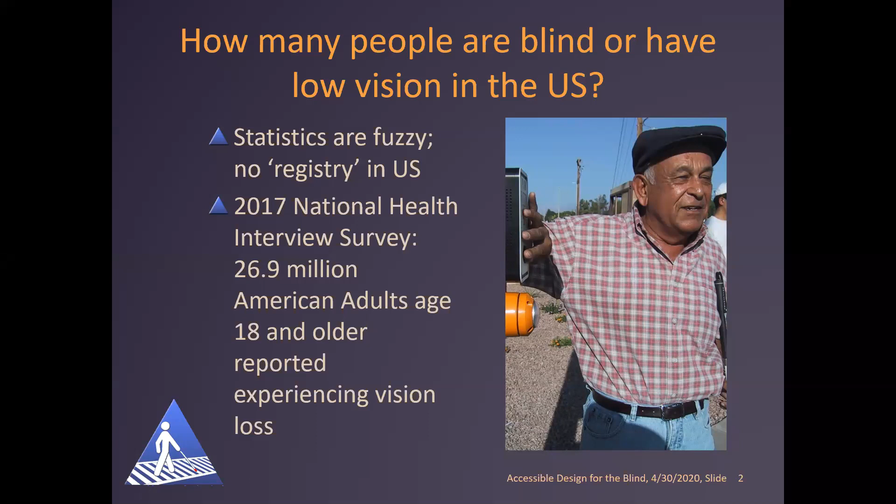Photo on the screen is of an older man with his hand on a push button type device. He has a white cane and looks like he's waiting to cross the street. A person with low vision, importantly, is not totally blind. Those limitations in vision can affect the ability to see signals, both the vehicle signal and pedestrian signal, affect the ability to judge traffic approach speed and distance, and particularly affect understanding drivers' intentions.

There's often advice given to pedestrians to see if the driver's looking at them, or watch for the driver to be waving them on. That doesn't work very well for many people with low vision or who are blind.

Depending on the level of vision loss, a person may not be able to easily find the crosswalk location. They may be depending on the markings and marking type, and may have difficulty seeing things like curbs, islands, or curb ramps.

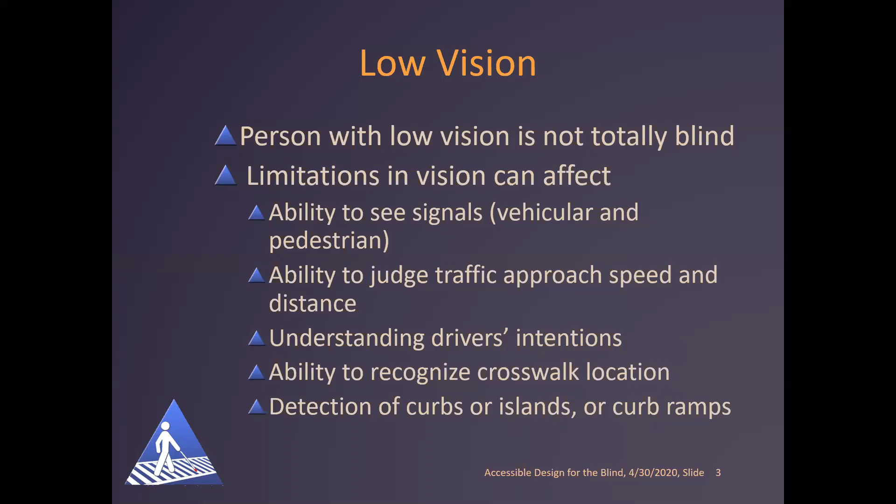We have a growing older population with low vision, and vision really can vary with different lighting conditions. One of the things that is common with older travelers is reduced contrast sensitivity. They need more contrast to see objects.

That may affect their ability to see things in the public right of way, like a pedestrian signal's white walking symbol against the sky. They also may react more slowly and move more slowly.

The photo on the screen shows an older man wearing sunglasses approaching a sign projecting from a post at head height. One other comment I want to reiterate is that many people with low vision do not use a cane or dog guide or any device that makes you recognize there's someone with low vision.

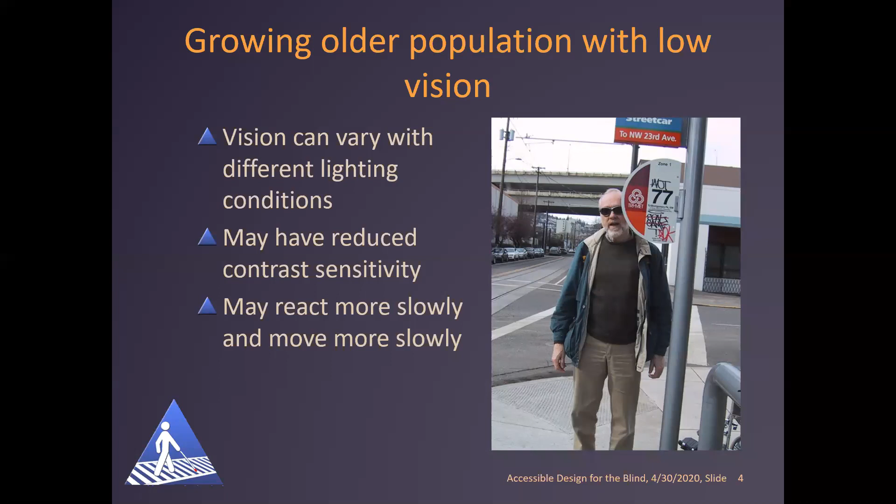For somebody who's blind or low vision, they have several transportation choices. Usually they can't drive themselves, but they can walk or use public transit, bus or rail. Some use paratransit services, taxis, ride services or shuttles, and may get rides from friends or relatives or use paid drivers.

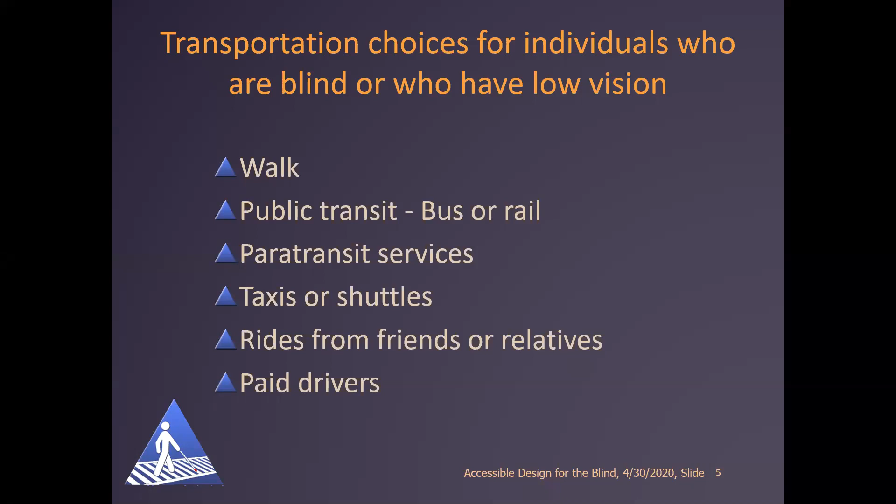People often use aids and techniques for obstacle and curb detection. Photo on the screen is of a man with a white cane extended in front of him while crossing a street. There are choices about what techniques are used by different people. The white cane is used as a probe of the walking surface, detecting changes in elevation or obstacles in the path. It also identifies a person as visually impaired or blind.

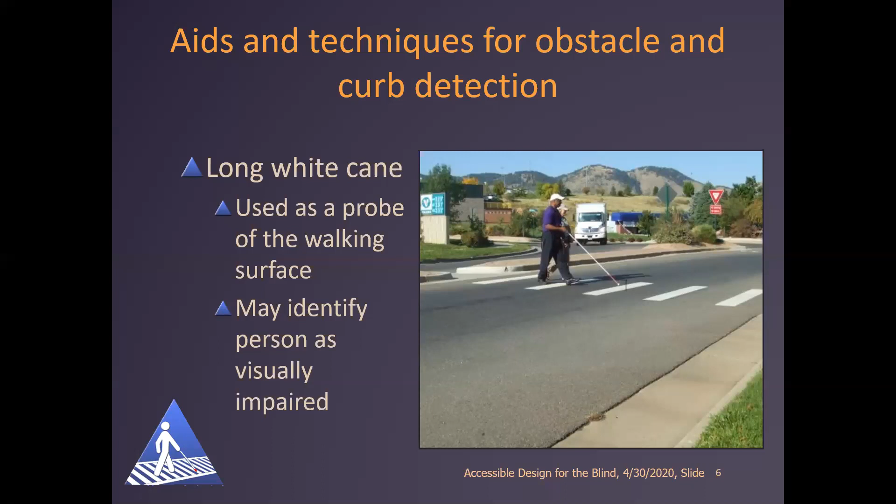Dog guides do guide around obstacles and stop at curbs and drop-offs, but the dog doesn't make the decision about when to cross the street or what to do when there's an obstacle blocking the whole sidewalk. The handler makes the decision and provides a command to the dog, directing it along a route with commands such as right, left, forward - not commands such as take me to the grocery store.

Other aids some individuals with low vision may use include additional aids such as a telescope, just for specific tasks like reading a sign.

In crossing the street, cues used at signalized intersections are the traffic stopping, vehicles starting and stopping, moving across the intersection, or accessible pedestrian signals. Different cues are used at unsignalized crossings. People need to listen for vehicles approaching or no vehicles, or hear a vehicle yielding, and often listen to traffic moving parallel to the crosswalk that would keep a vehicle from crossing it. Those cues aren't available at many unsignalized locations and may make those crossings difficult.

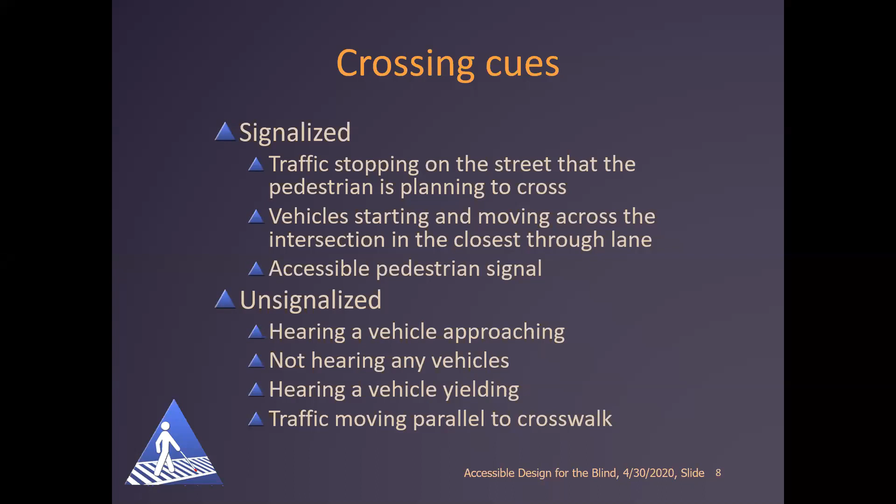Orientation and alignment cues are what we'll really be talking about today in this webinar. We talked more about signals and issues with signals in the webinar on Tuesday, so please consider going back to that if you're interested in or concerned about those issues.

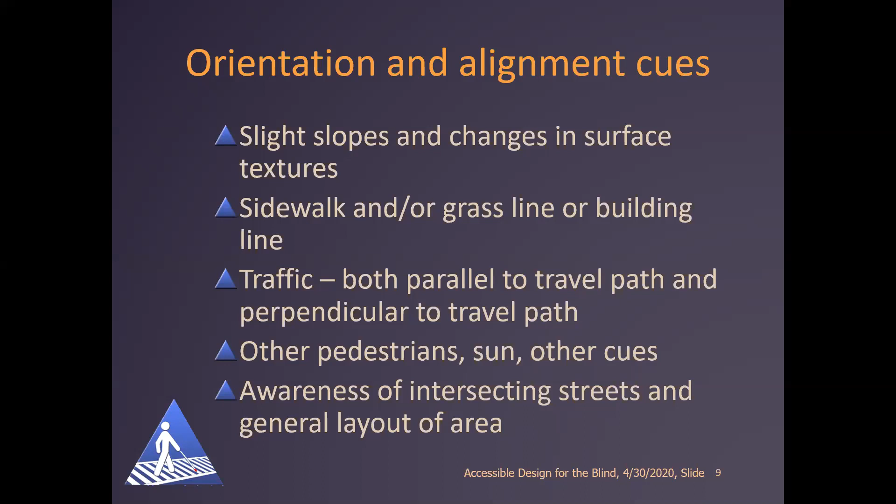In orientation and alignment, people use different things and different techniques work for different people. An individual may use slight slopes and changes in surface texture, the sidewalk edge or grass line, building line. They use the sound of traffic, both parallel and perpendicular to their travel path. When available, they pay attention to other information such as other pedestrians moving, the sun, and other sound cues common in the environment, or information gathered tactually and auditorially. For orientation, it's generally helpful to have awareness of the intersecting streets and general layout of an area.

There was a project that looked particularly at orientation and alignment cues and wayfinding for individuals who are blind or visually impaired, particularly at roundabouts and channelized turn lanes. It was NCHRP Project 3-78B, Guidelines for the Application of Crossing Solutions at Roundabouts and Channelized Turn Lanes for Pedestrians with Vision Disabilities. Part of that project was research on wayfinding at roundabouts and channelized turn lanes, noting problems participants had, and also finding features that improved their ability to find the proper location to begin crossing and to align to cross more accurately.

We were not looking at locations where tactile warning surface indicators were installed, which is more what we'll talk about in later parts of this presentation. But NCHRP Report 834, published in 2017, did include a wayfinding assessment that can possibly be applied to other types of intersections, so I encourage you to look at that report for additional information on wayfinding and orientation and alignment cues.

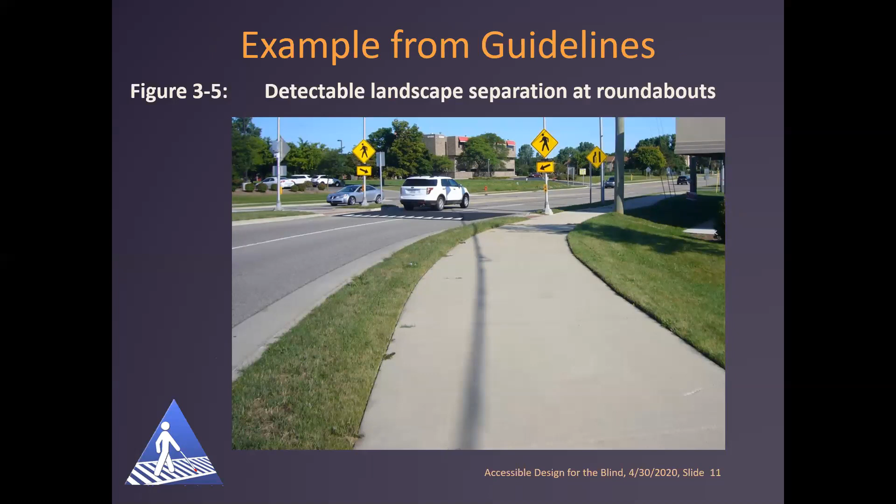Just a photo example from the guidelines in that publication. The photo shows a roundabout with a fairly wide sidewalk, but a landscape separation between the sidewalk and the street, a grass strip that follows the curvature of the street and ends right at the crosswalk. That's a detectable landscape separation at roundabouts that helps individuals who are blind or visually impaired find the crosswalk location accurately.

Important information to remember is that people who are blind do travel independently to new places. They are not oriented to every place they may go. They're traveling to unfamiliar destinations for shopping, errands, visiting friends, children's activities, all the kinds of things that fully sighted people might be doing. They're more likely to be using transit and walking rather than driving themselves. They may get directions from people or use a GPS device.

They walk along the streets and get to intersections and basically have to figure it out when they arrive. If they're unaware of changes to intersections or just not familiar with an intersection, they may at times make dangerous decisions, especially when the layout's unconventional or a familiar intersection has been changed. We'll talk more about cues that people can use in traveling, and I'll turn it over to Donna, who will talk more about that.

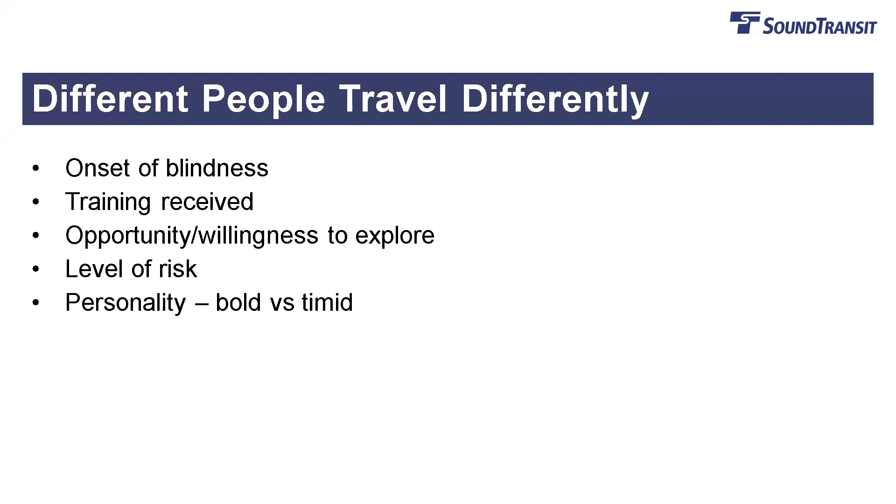When we're planning or designing pedestrian facilities for the public, it's important that we keep in mind that not everyone travels independently in the same way or with the same level of skill. And we want to make sure that our facilities work for as many people as possible.

There was a lot of information on the first webinar that happened on Tuesday about how people who are blind travel. I hope that if you did not participate in that webinar, that you listened to that recording. For the sake of time, I'm going to kind of jump through this particular slide a little quickly and only touch on a few things. But I use sound and touch—those are my two major senses that I use when I'm out traveling around.

We've already heard some of the things about audio cues and how the sound of traffic helps us stay oriented and know when to cross the street.

The one that hasn't been mentioned that I want to mention is echolocation. This is when you can hear obstacles because they interrupt the sound of open spaces. So when there's wide open space, and then all of a sudden there's a pole or a person or a bus shelter or a wall that you're coming up on, that interrupts that open space sound, and you're able to actually hear it. This is not something that most people with vision pay much attention to, because you don't have to. I did threaten the last person who compared me to a bat, but it is that same type of system that bats or dolphins use—using sound that bounces off of buildings and other obstacles to stay oriented. And I use this quite a lot.

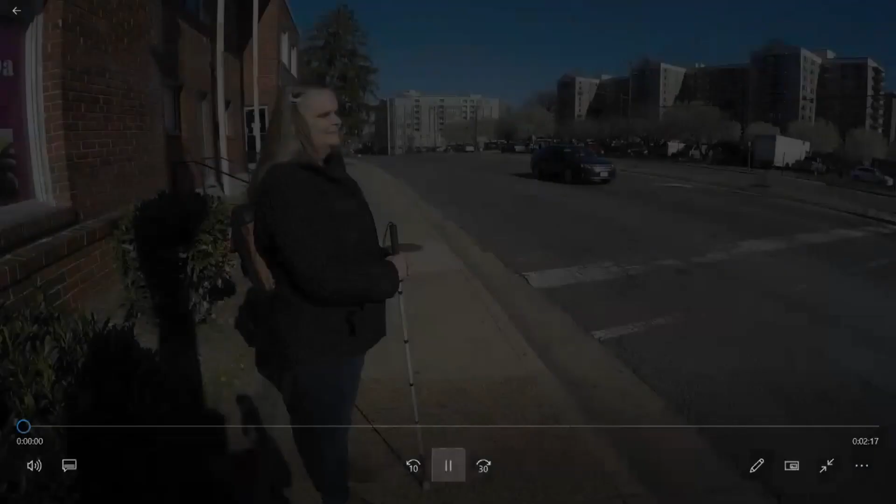This is the top of a T intersection that I have to cross every day. The sound cue I'm listening for is traffic moving in the parallel direction, the same way I'm trying to walk. Because it's a T intersection, I'm not going to get that sound cue. I can hear the traffic in front of me, and the only thing I'll be able to hear when this traffic stops is the turning traffic from the other side of the road. So that's my cue as to when I can walk.

We're going to listen to this for just a minute. We have good, strong traffic on Columbia Pike. No problem telling that I can't walk right now. Let's listen. Still moving through, you can still tell that. Right now it's getting a little quieter. That car is still obviously going, so I can't cross yet. Still moving. Alright, so I know it's getting close. Now I do hear a car turning. I can hear, I still have through traffic that way. Alright, I think I can cross now.

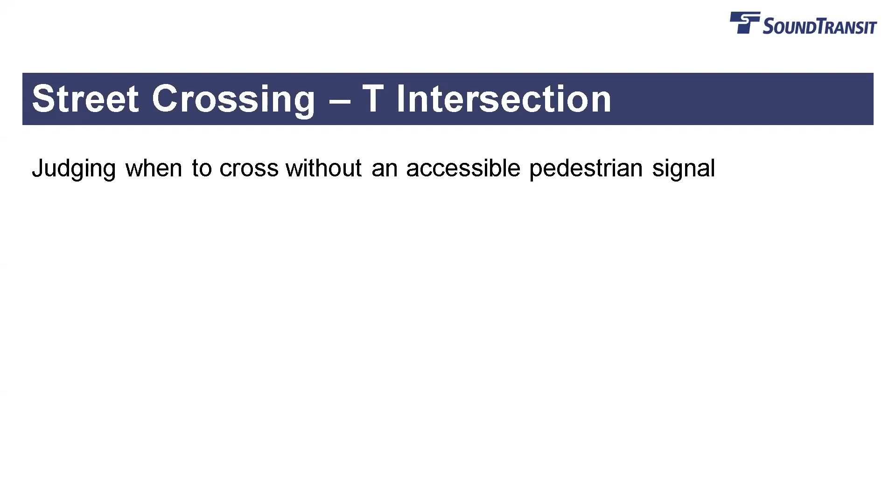Another thing to consider is that the sound of the wind, which you could hear blowing against the microphone, also affects what I can hear and how I use it. So that makes it a little bit harder for me to cross streets when there's that kind of sound going on as well. This video is going to be posted up with the webinar materials as well as 2 other videos we don't have time to show, so feel free to download those and check them out later.

The waiting pad, we call those corduroy pavers. They kind of feel like corduroy, with ridges under your feet and under your cane. They're pretty distinctive - you can tell them easily apart from the tactile warning strip, the truncated domes, and also from the tactile wayfinding paver itself. So you know that when you get to the waiting pad, that's where the train door is going to open. We have markers on our platform so that when the operator drives the train in, he stops at that marker, and when the doors open, there is always an open door in front of the waiting pad. We have 2 of these on each of our platforms for our light rail system.

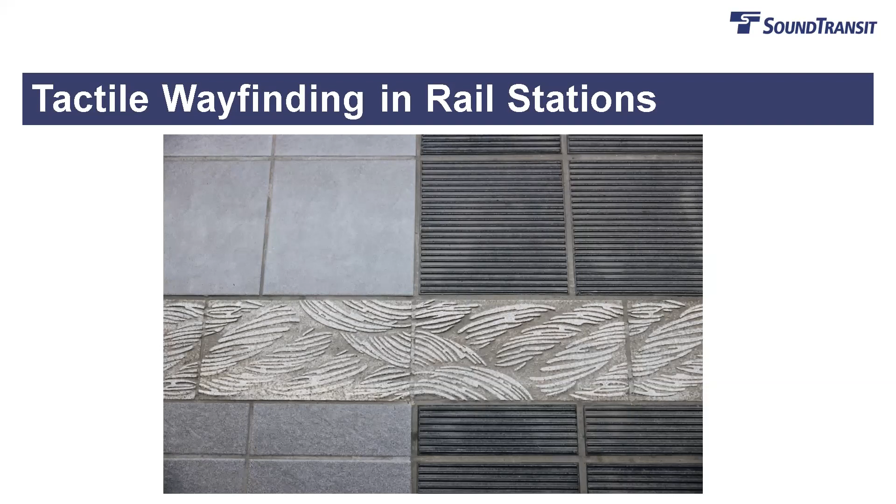And of course, the best way to figure that out is to have people who use canes help you determine what's the best surface to use.

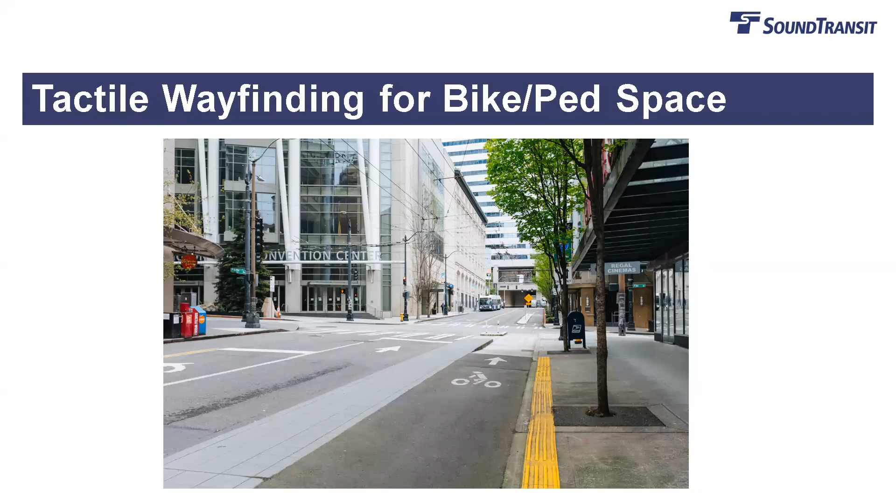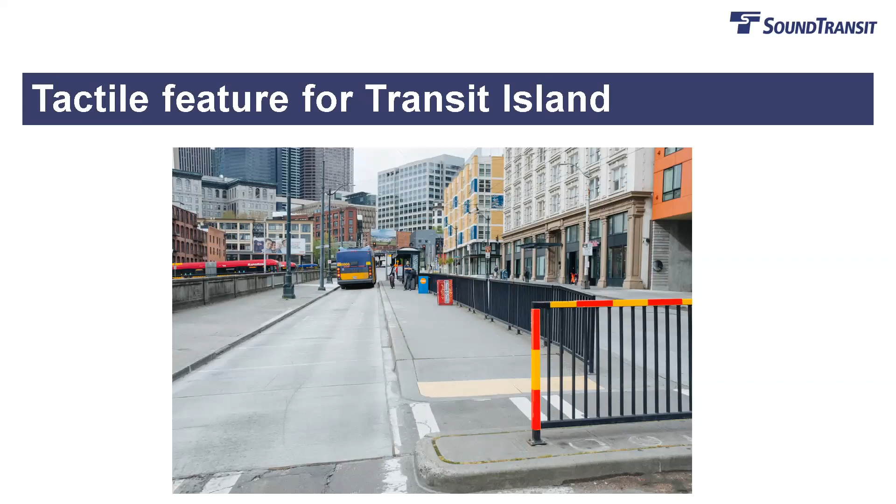This is a transit island near my office in downtown Seattle. You can see it uses handrails and fencing to direct pedestrians to walk up that island to the bus shelters and the bus stop in order to catch their bus, and it gives them some protection from drivers. It's also very visible to drivers that this is where pedestrians will be.

As I've mentioned before, there's always some level of stress. I've been doing this for 58 years, and no matter how familiar I am with a particular location, there are always things that change within that environment, so there's always some level of stress. These are some things that I think we can start to incorporate in design that will help alleviate some of that stress and make it easier.

So first, consider the travel needs of everyone. Don't just focus in on that norm. You're going to be missing out on people who really need to use your facilities.

So I hope you'll think about some of the things you've learned about how I travel. I do not fix on a visual point hundreds of feet in front of me and then start walking toward it, that's just not within my ability to do. I don't do it that way. I do have a route in mind, and I know generally speaking what the layout is, unless of course I'm going to an unfamiliar place.

What I'm doing is working through a series of sequential cues that can be found through sound or the reach of my cane. So in a very defined space around me, the extent of what I can hear and touch with my cane as I'm walking forward, this is what I'm using in order to navigate.

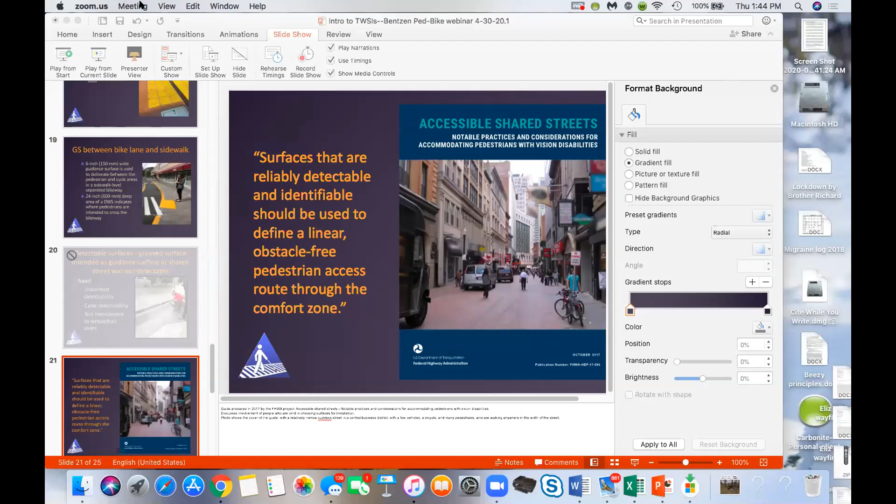Okay, there are 3 more presentations here that are all related to what are known as tactile walking surface indicators. First, I'm going to give a little bit of background. Then Rob Wall Emerson is going to talk about some research to solve a particular kind of problem using tactile walking surface indicators, and then I'm going to talk about another research to find another solution.

Tactile walking surface indicators were developed in Japan in the 60s as a guidance and warning system. They used raised domes or truncated domes to indicate cautions, a transition, or point of interest, and raised bars oriented in the direction of travel to indicate the path of travel. They're used with some variations to some extent in most developed urban areas of the world, and are broadly standardized in an international standard, ISO 23599, which allows a lot of latitude.

Oh, why is my screen not advancing here?

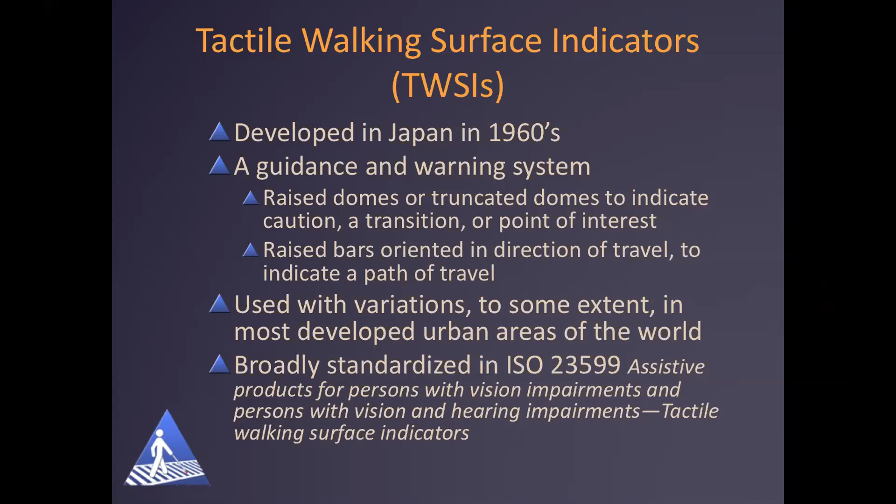The standards that we have in the US were a result of a lot of research. Donna mentioned that it's very hard to detect a lot of surfaces that look like they would be detectable, like the wavy surface that's used on transit platforms in Seattle. No surface that was comprised of grooves in concrete was ever found to be detectable.

It's important that it's detectable both underfoot and with a cane. Some things that are detectable with a cane won't be detected underfoot. Underfoot is the most important thing because many people who are visually impaired don't travel with a long cane. But surfaces that were raised domes or truncated domes or raised bars that were 0.2 of an inch high were highly detectable, and it was found that about a 24-inch width in the direction of travel was necessary for most people to detect them and come to a stop without going beyond them.

This is important in thinking about our detectable warning standard. The federal standard is a detectable warning of a minimum of 24 inches in the direction of travel, because they're usually used where you have either a drop off or traffic in front of you. So it's important that you not go beyond them without stopping. And it was also found when they were implemented that they increased safety at platform edges and curb ramps for all riders.

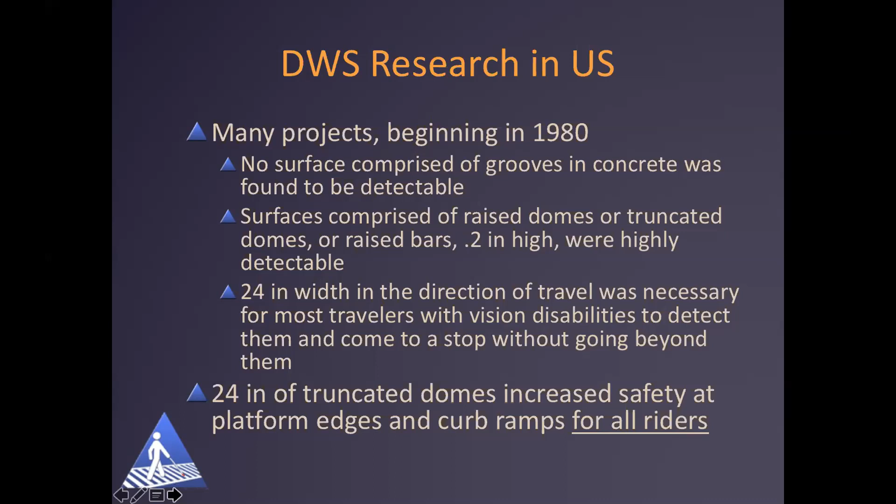I think one of the most useful standards, there's several, but it is the 2006 DOT ADA standards, and section 705 specifies the dome size and spacing and visual contrast. The drawing on this slide shows that the domes are 0.2 of an inch high. The base diameter can vary between 0.9 to 1.4 inches, and the top diameter is in relation to the base diameter, 50 to 65%, and the center spacing can vary from 1.6 to 2.4 inches. So there can be quite a wide variation. In point of fact, most manufacturers are manufacturing to the wider spacing of the truncated domes and the smaller domes.

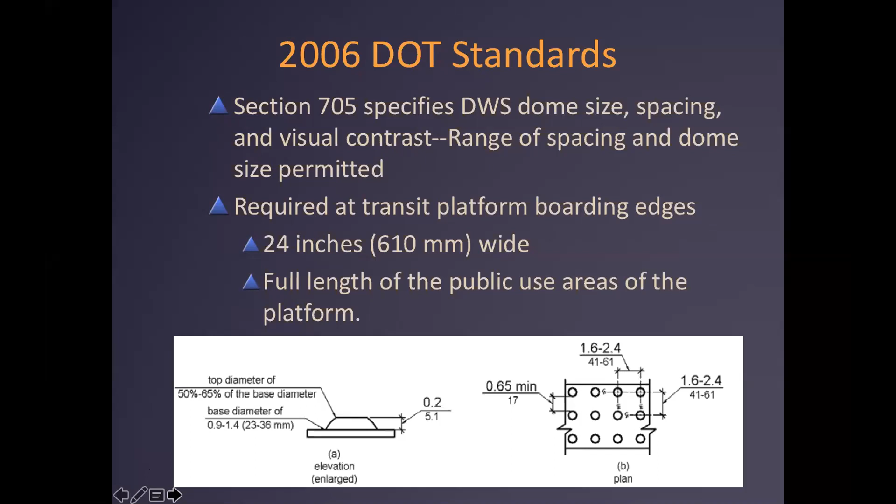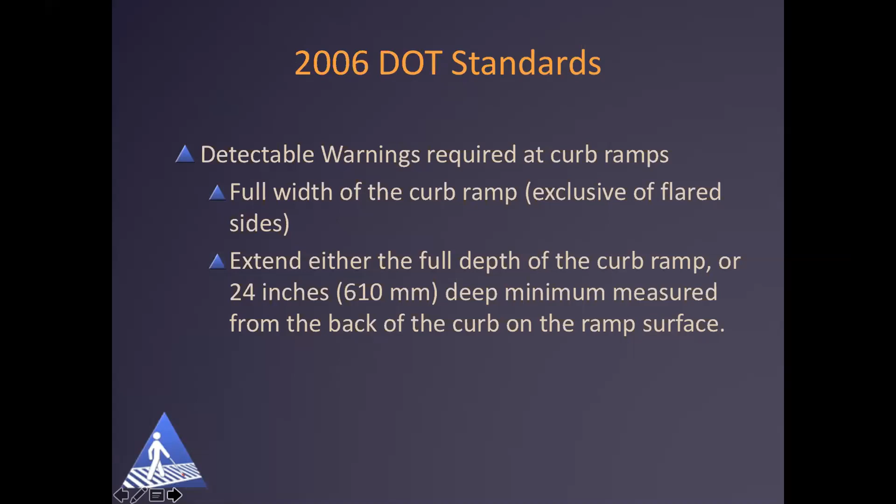So the 2006 DOT standards require them both at transit platform edges and at curb ramps. When they're in curb ramps, they're the full width of the ramp, not including these flared sides. And they can extend either the full depth of the curb ramp—I don't think anybody's doing that anymore—or 24 inches deep minimum measured from the back of the curb on the ramp surface. As far as I know, the only other place that there is a different standard for that is that California requires 36 inches on curb ramps.

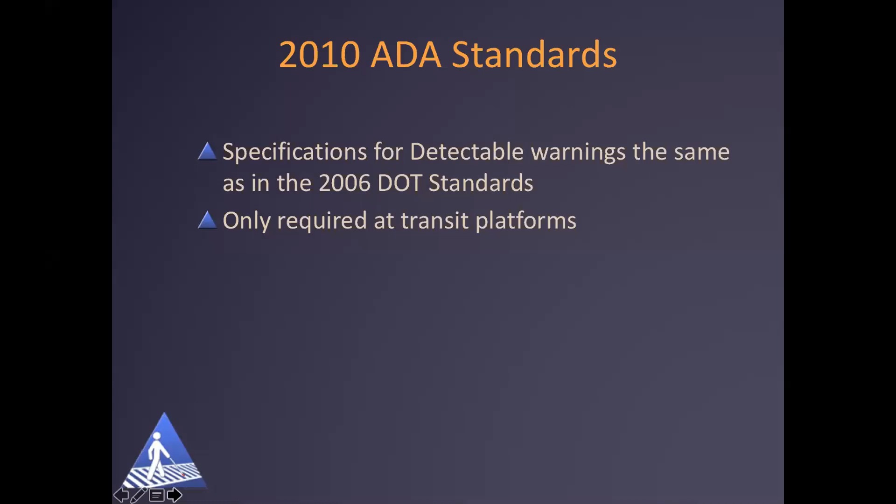The 2010 ADA standards, the most recent DOJ ADA standards, have the same specifications as in the 2006 DOT standards, but they only require them at transit platforms. It's the DOT standard that requires them also at curb ramps.

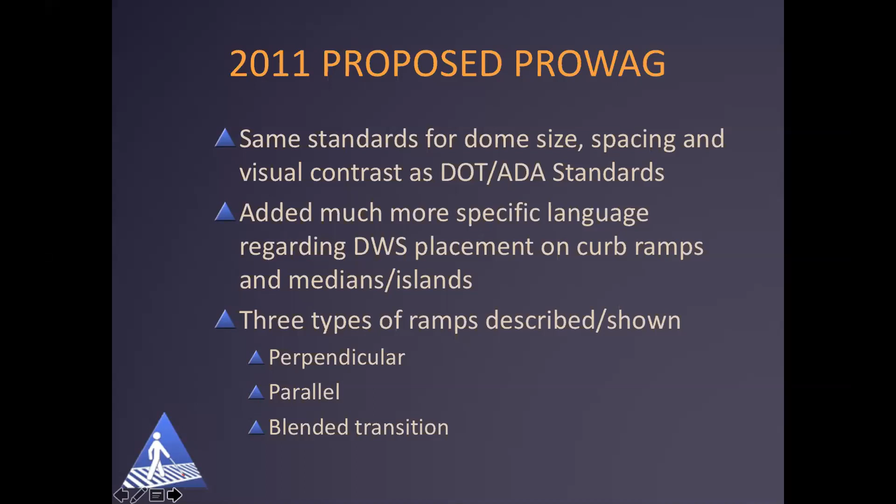Then we have the 2011 proposed PROWAG, not yet a final standard, but considered the best design guidance for detectable warnings. It has the same standards for dome size, spacing, and visual contrast as the DOT and ADA standards, but it added much more specific language about the placement of detectable warnings on curb ramps and medians and islands. It talks about 3 different kinds of ramps: perpendicular, parallel, and blended transition. I'll let you go to that standard to see what they are, but there's quite specific guidance about different situations.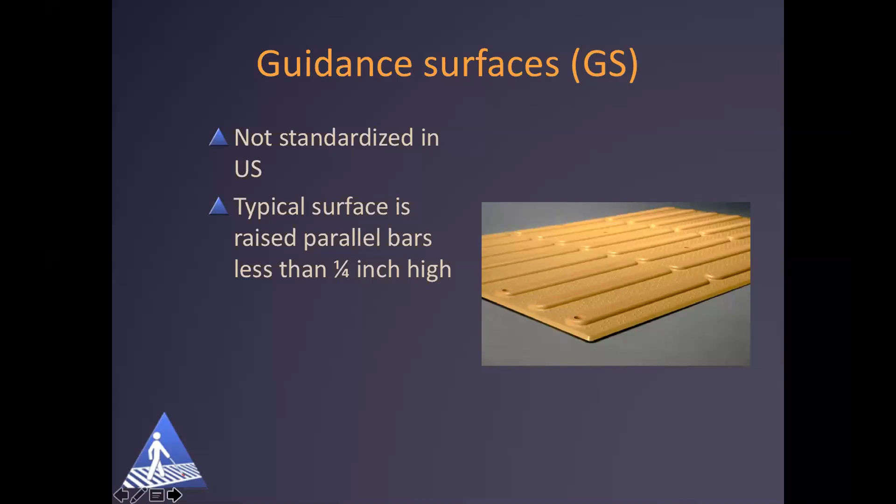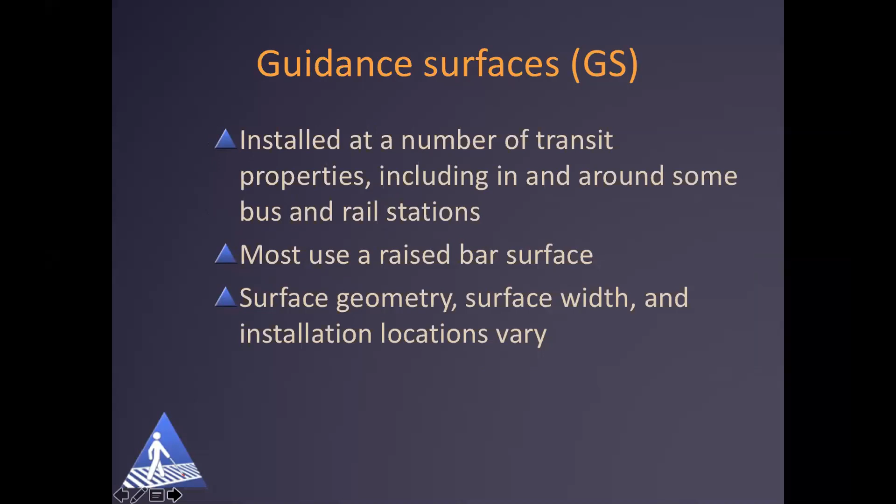Guidance surfaces have been installed at a number of transit platform properties, including and around some bus and rail stations. Most of them used a raised bar surface, but there are a lot of variations. Here are a couple of examples.

In the drawing on the left, a black 12-inch wide raised bar guidance surface leads through a fare gate in a transit station. And on the right, a yellow 6-inch wide guidance surface leads on 2 sides of a wide sidewalk from a transit station out to a bus stop.

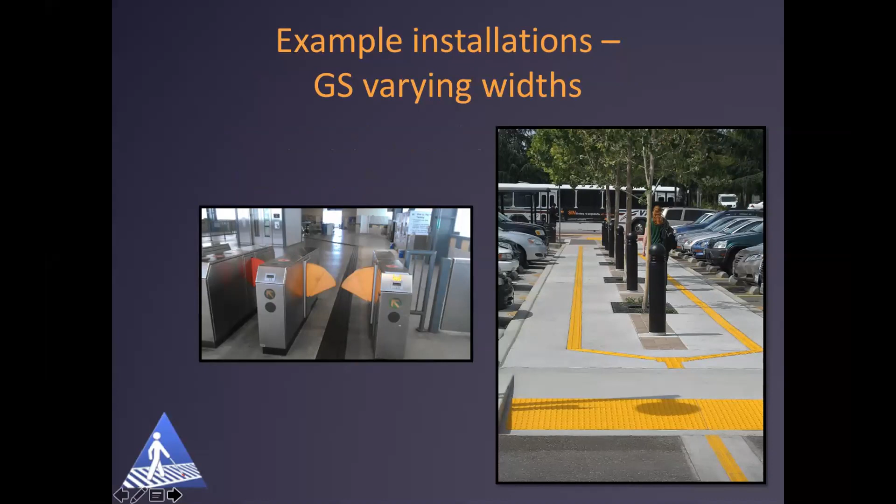Two more examples here. On the left, a 24-inch wide black guidance surface leads to the stairs in a transit station. And on the right, a 6-inch wide yellow guidance surface leads along a sidewalk to a bus stop.

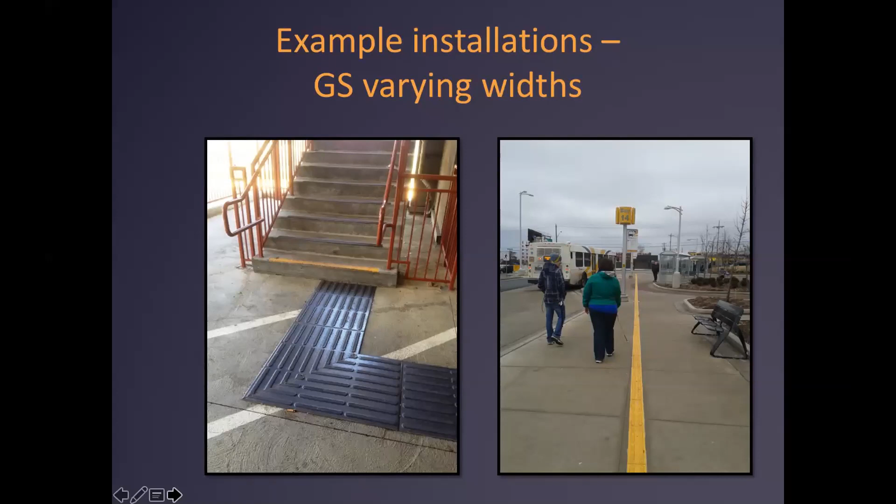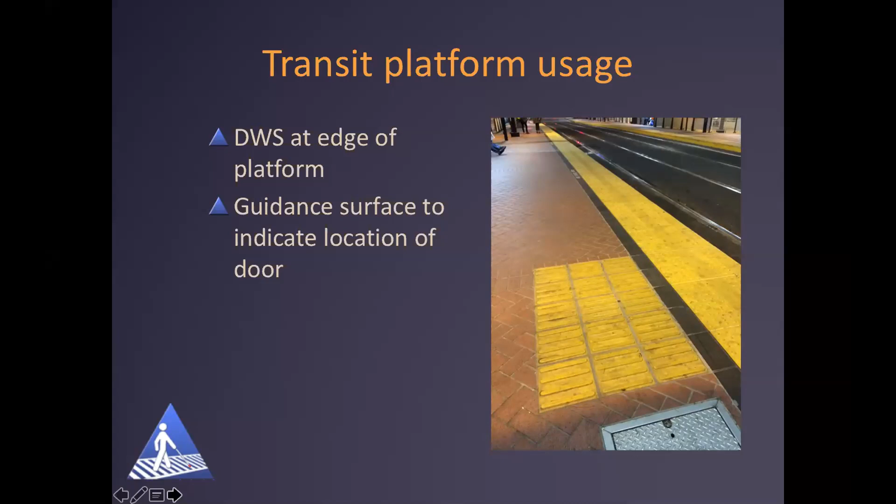Detectable warnings are now installed or planning to be installed on all transit platforms in the US at the edge of the platform. This is different than in lots of other places around the world where they're set back from the edge. In this photo, you see the yellow detectable warning surface right at the edge of the platform at the drop, and then a 6-inch wide black surface along the edge of the detectable warning, farther away from the drop, to increase the contrast between the brick red of the platform and the yellow of the detectable warning. And then there's a 5-foot wide, 3-foot deep rectangle of raised bars that indicate where the train door will open.

This slide shows a 6-inch wide guidance surface that had been used in Seattle to delineate between the pedestrian and cycle sides in a sidewalk level separated bikeway. They found that 6 inches wide wasn't enough, and they're in the process of changing that to 12 inches wide. In this photo, a 24-inch deep area of a detectable warning surface indicates where pedestrians are intended to cross the bikeway.

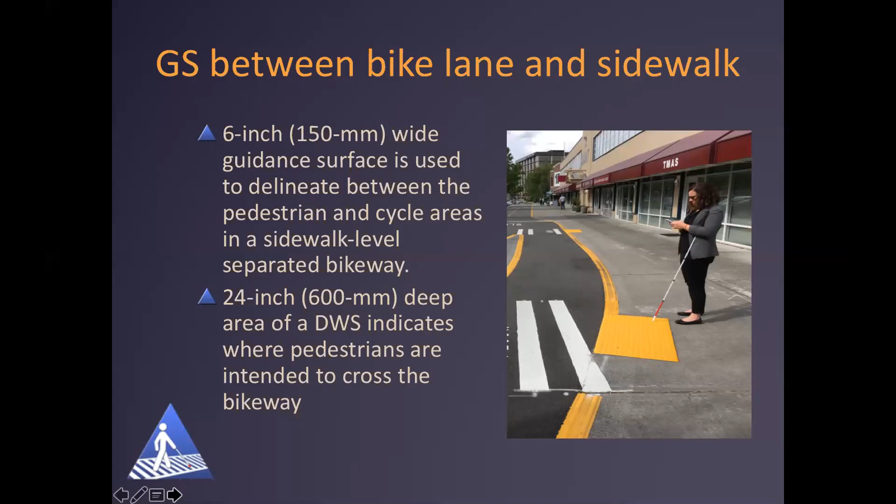There was a project concluding in 2017, an FHWA project that Elizabeth Hilton was leading, on accessible shared streets. The title of the report is Accessible Shared Streets, Notable Practices and Considerations for Accommodating Pedestrians with Vision Disabilities. A quote from that report: surfaces that are reliably detectable and identifiable should be used to define a linear, obstacle-free pedestrian access route through the comfort zone.

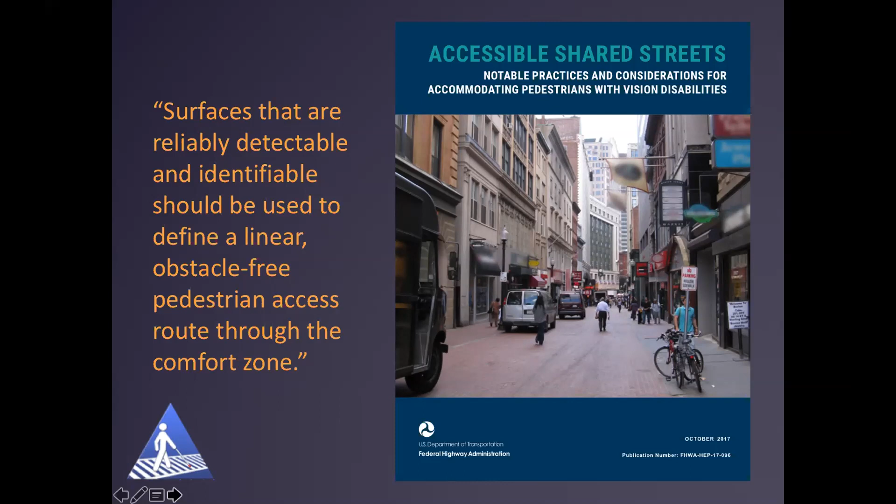There's been some recently completed research that extends this. At the conclusion, I will be talking about research to identify a delineator for separated bike lanes at sidewalk level that's highly detectable to pedestrians with vision disabilities and crossable by people with mobility disabilities. This was an activity of the Better Market Street project in San Francisco, and came out with a recommendation that a raised trapezoidal strip, 0.75 inches high, 6.25 inches wide at the top, with sloping sides at a 22-degree angle, should be used as the delineator for separated bike lanes at sidewalk level.

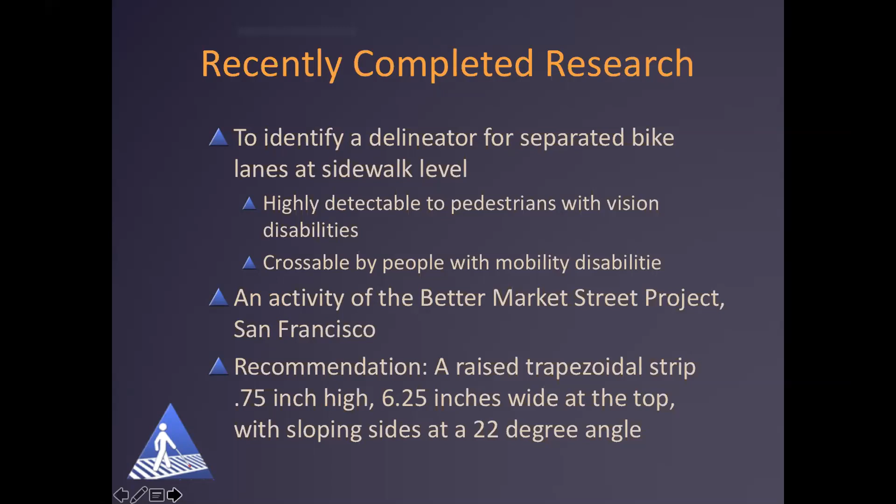So there's ongoing research on TWSIs, Rob is going to talk about this in a minute. The project was called Effective Guidance Surfaces for Travelers with Vision and Mobility Impairments, and this was research on a novel use of a guidance surface to aid in locating crosswalks and aligning to cross in challenging locations.

Additional ongoing research that Janet Barlow and I are both involved in is tactile wayfinding in transportation settings for travelers who are blind or visually impaired. This includes both public rights of way and transit. It's under the Transit Cooperative Research Program B46, led by the Highway Safety Research Center at University of North Carolina. It consists of laboratory research that will identify the geometry of a guidance surface that's highly detectable and discriminable from the detectable warning surface. You've got to be able to find it, and you've got to be able to know that it's not the truncated domes. And it will determine whether a special indicator surface is needed at choice points, and identify a recommended surface if needed.

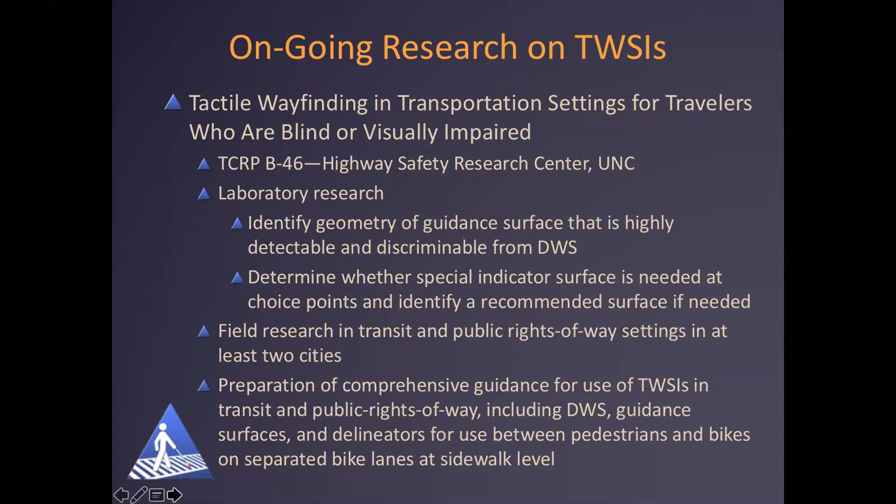This is common internationally. We're not sure whether it's really needed, so we'll do some research on that. There will also be some field research in transit and public rights of way in at least 2 cities. And finally, preparation of a comprehensive guidance manual for use of tactile walking surface indicators in transit and public rights of way, including detectable warnings, guidance surfaces, and delineators for use between pedestrians and bikes on separated bike lanes at sidewalk level.

And now I'm going to turn it over to Rob, who will talk about the research to help blind people locate hard to find crosswalks and align to cross.

Thank you. And I will try and share.

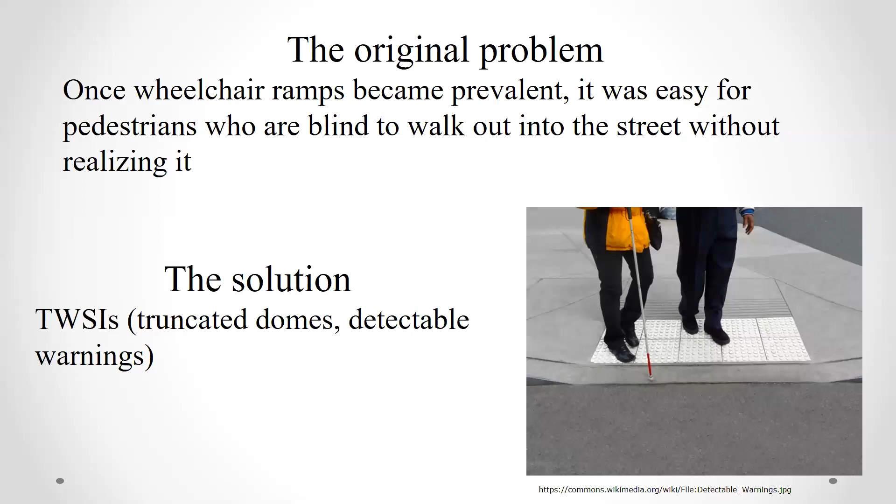tactile walking surfaces are used primarily as what we call detectable warnings. These are the truncated domes at the bottom of wheelchair ramps, and this is prevalent because when wheelchair ramps first became more ubiquitous within the built environment, people who are blind could easily walk into the street without realizing it. So the answer is that detectable warnings, the truncated domes, are placed at the bottom of ramps simply to indicate the place where the walking surface transitions to the road surface, but there is no actual step down or step up. There's no level change.

That, to some extent, solved the problem of people who are blind walking into the street down the ramp, but it has led to some other secondary issues.

The bottom of a wheelchair ramp isn't always the place where a person who's blind should stand to cross the street. It often is, but it isn't always. And so it leads to the misunderstanding that that is where you're supposed to stand. There's 5-10% of the time that is incorrect.

The other, I think, common misconception is that people who are visually impaired or blind get alignment for their crossing from the detectable warnings, and that is incorrect. They are detectable underfoot and by the cane, but they do not provide any kind of alignment information.

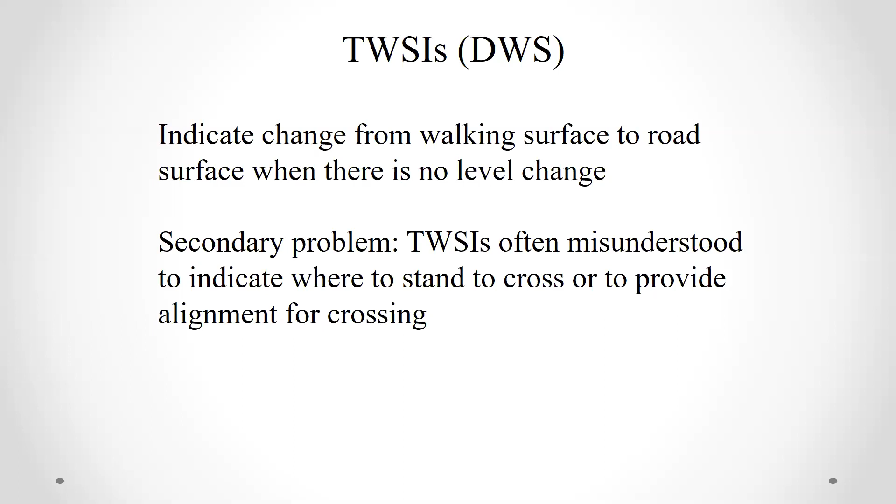Now, Donna did talk about using traffic. Traffic flow is a very robust cue for people lining up to cross a street. However, if you're faced with certain kinds of crossing situations, such as a skewed crossing, that robust alignment to traffic can lead you to align incorrectly for the crossing. And on a corner like these, you wouldn't know that until you started crossing and did not end up going where you thought you were going to go.

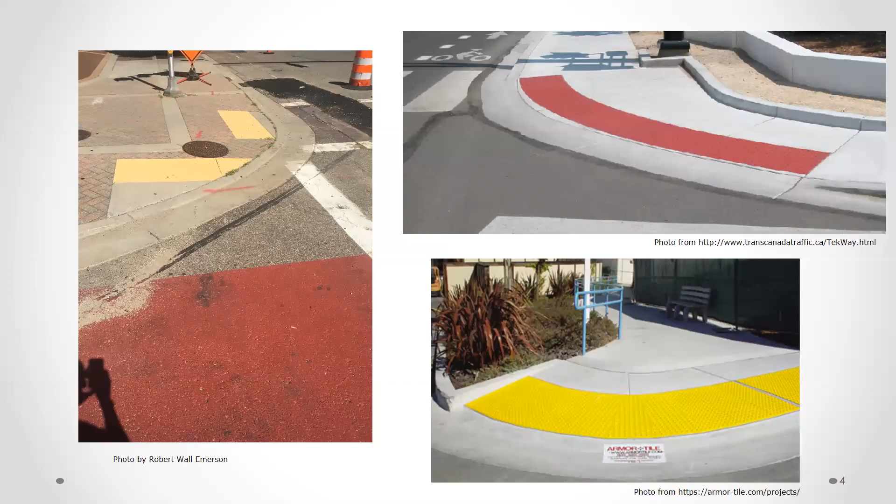BL mentioned that there are these guidance surfaces that are used in many places, many other countries, and then more recently in the US for different functions.

These parallel bar tiles, guidance surfaces, can be used for alignment. If a person who's blind or visually impaired stands on these bars so that they run perpendicularly under the balls of the feet, often you stand on the very first line of bars or the very last line of bars in the set of parallel bars, you can get a sense of alignment from that. And as long as these are installed to actually be lined up with the crossing, that does provide a tactual alignment cue for the crossing.

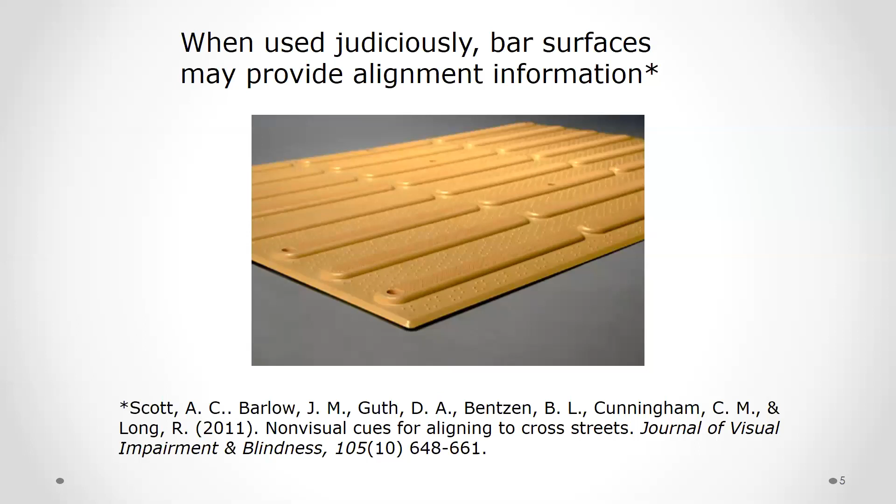So for this project, we looked at those bar tiles, which I'll refer to as guidance surfaces, to indicate where a pedestrian would stand to cross and to provide alignment information.

We used these at crossing places that might be confusing: roundabout crosswalks, mid-block crossings, skewed crosswalks, places where either the traffic or traffic patterns would lead to incorrect alignment, or where it was difficult to decide exactly where a person was supposed to stand to cross.

I want to highlight that we didn't think this would replace detectable warnings. These would be used in conjunction with detectable warnings. Detectable warnings serve one function, which is to indicate the bottom of the wheelchair ramp, the boundary between the walking surface and the road surface. These would be used only at certain difficult crossings to indicate more precisely where a person should stand and to give them some alignment information.

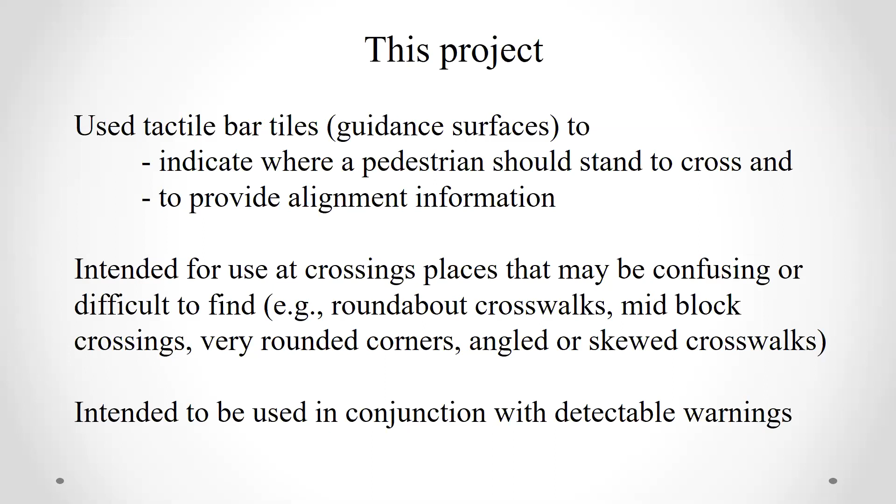We did two phases. I'm going to talk about phase 2 first. That was with people who were visually impaired and blind. The first phase was people with mobility impairments, and I'll talk about that after this slide.

We looked at a lot of different kinds of problematic crossings: skewed crossings, crossing the top of a T, very large radius corners, apex ramps. That's a good example of a place where the patch of detectable warnings may not necessarily indicate where you should stand for either of the crossings.

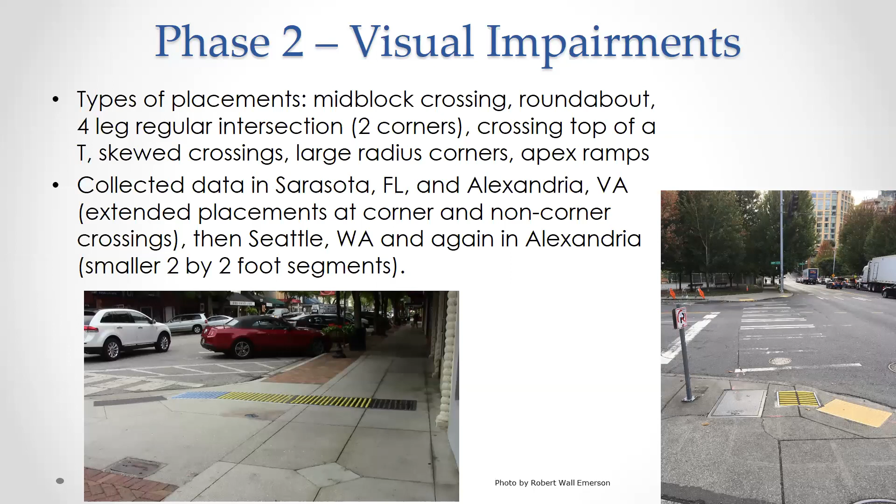We tested the placement of these guidance surfaces with people with mobility impairments who used manual and power wheelchairs, mobility canes, crutches, walkers, and a variety of mobility aids, to see how traversing these surfaces in different ways might create problems. It turns out that for almost all participants in that study, crossing the guidance surfaces parallel with the line of the raised bars was the easiest way to traverse them, the least inconvenient way.

This works out well, because in that installation at the mid-block crossing, with the guidance surfaces extending across the entire sidewalk, a person in a wheelchair just going along the sidewalk would roll right through the grooves between the raised bars, ideally, without discomfort. And if they wanted to turn and go down the ramp to use the crossing, these would not be on the ramp either, so they would not be inconvenienced in that regard either.

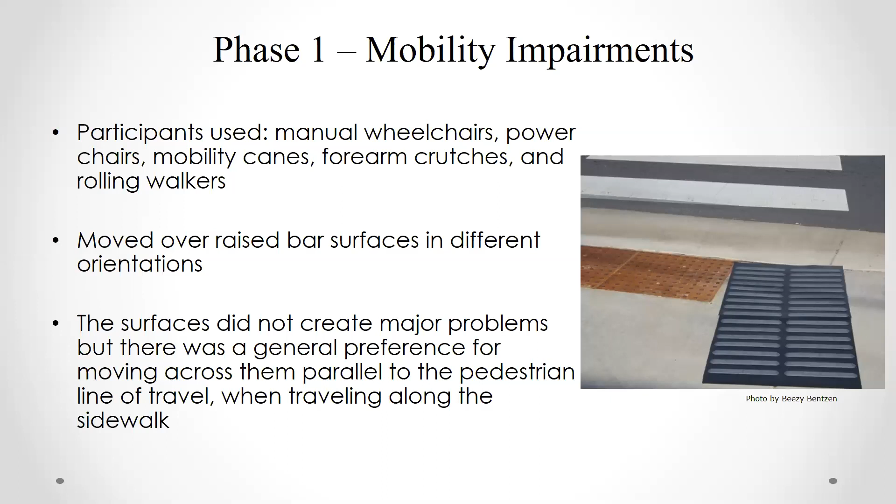This way of installing these guidance surfaces seems to serve both the population with mobility impairments and visual impairments best. The findings for people with visual impairments is that they did find these surfaces well—a little less in the first round in Sarasota, but at the other sites it was in the 90th percentile.

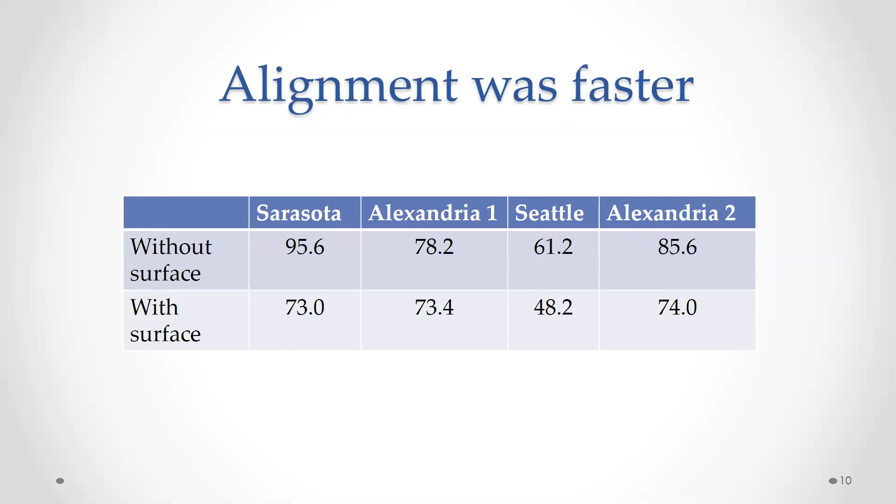For alignment, we collected data both with and without the guidance surfaces at all these crossing places. They aligned much faster when the surfaces were in place. They also aligned much better, and this was a dramatic change. At every single site we went to, the precision of their alignment for the crossing was at least twice as good, sometimes 3, 4, 5 times as good as without the surface.

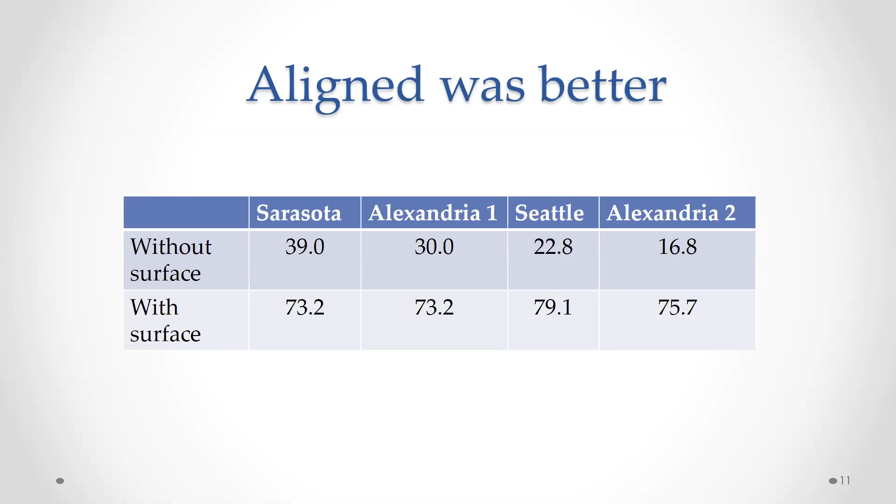In all the site locations, they aligned or tended to align on the ramp, on the detectable warnings, or on the guidance surface. So if the guidance surface was there, they were standing in an appropriate place much more often than if the guidance surface was not there.

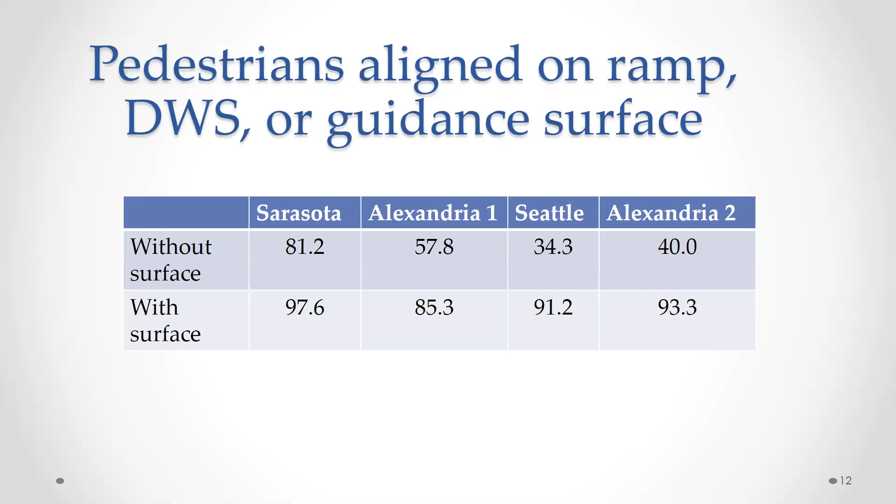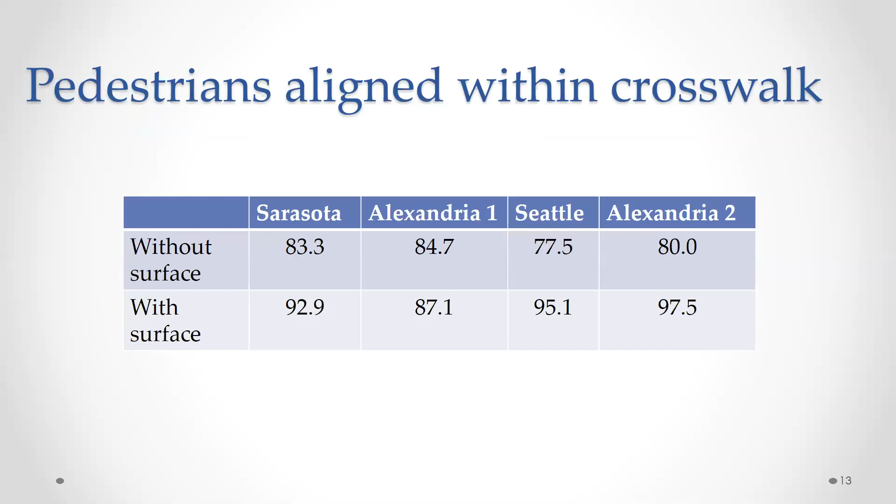They almost always aligned within the crosswalk. They tended to align fairly well, at least within the crosswalk, without the surface, but it always improved with the surface installed. So generally, people who were blind in our study were able to find those surfaces and align to them to cross much better than with the surfaces if the surfaces were not there.

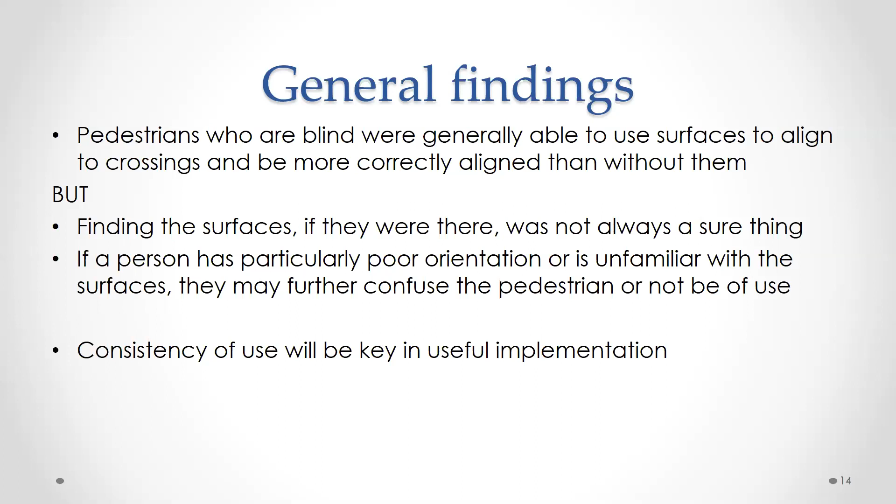But finding them was not always a sure thing. If a person has particularly poor orientation or doesn't know about these surfaces or what they mean, that might cause some confusion and some inconsistency in their use. So installing them in a consistent manner and some sort of educational program would probably be important if they were used more.

In non-corner crossings, like that mid-block crossing or the top of a T, they might need to extend across the entire sidewalk to the building line. Corner placements probably would be best to use the smaller 2 by 2 foot segments. Otherwise, longer segments of the guidance surfaces will interact with each other and create some confusion.

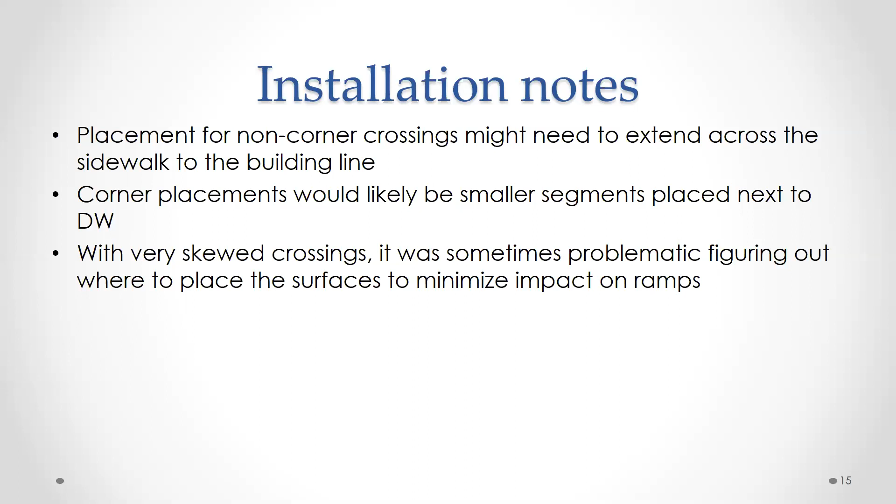With the very skewed crossings, when the streets are not at right angles to each other, sometimes it got a little problematic in figuring out exactly where the best place to put the surfaces was. So there may be still some work to be done to figure out what the best installation parameters are for every situation.

We do already have out a synthesis of tactile walking surface indicators in the US and international, and we're in process of developing a guidance document from this on how to best use these guidance surfaces to help people who are visually impaired locate crosswalks and align to cross.

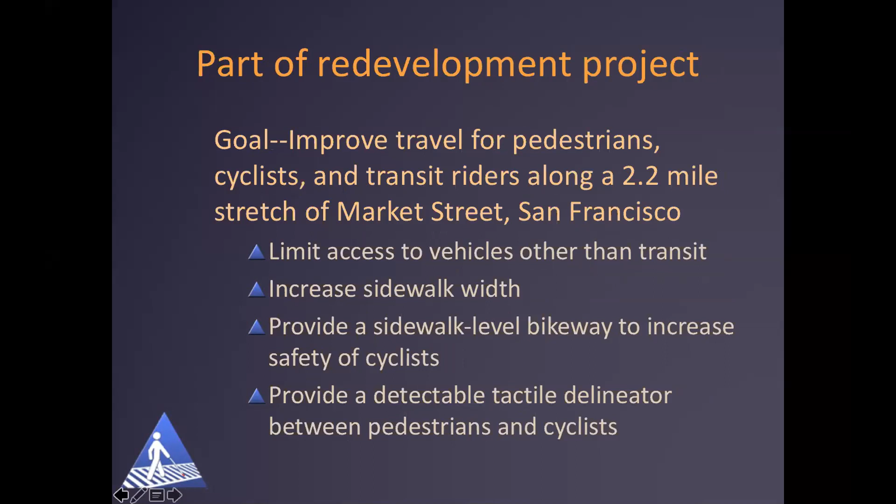So the research was conducted as a part of a redevelopment project in San Francisco, the Better Market Street project, that is redeveloping a 2.2-mile stretch of a major artery to limit access to vehicles other than transit and increase the sidewalk width to benefit pedestrians, and also to provide a sidewalk level bikeway to increase safety for cyclists. And they knew that they needed to provide a detectable tactile delineator between the pedestrians and cyclists, and were willing to spend the money to actually do some research on it.

So in the approach to identifying a delineator, there isn't any US standard or guidance for that. But we needed to conduct human factors research to identify a delineator that was at least as reliably detected by pedestrians who are vision disabled as the truncated dome detectable warnings, and accurately identified by them, and that also was not a barrier to crossing by people having mobility disabilities.

Now, the idea is never that it would be placed in an area which is a crossing, a planned place that any pedestrian, including pedestrians with disabilities, would in fact be crossing. But it shouldn't be a barrier so that if you should need to cross it, a person with a mobility disability couldn't get across it.

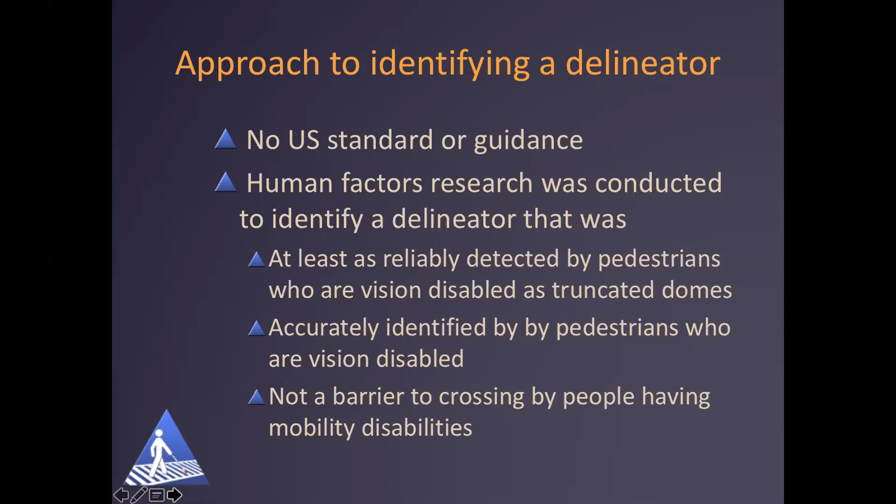But there were 4 surfaces tested. First of all, we were testing truncated domes as a baseline because we wanted to make sure the others were identifiable from them, discriminable from them, and at least as detectable.

So we used the truncated dome surface that is most common in San Francisco, which has the closer spacing in it. And we compared that with a directional surface, the most common directional surface of raised bars that we're seeing in the US, the one that is standard in California, that has 4 bars on a 12-inch tile, 0.9 inches wide. And then a pattern that we call corduroy, which had narrower bars that were a little closer spaced.

And then one that was quite different, that was based on the guidance that existed in the UK for a couple of decades for a surface to use exactly for this purpose, separating bikes and pedestrians at the same level, which was a raised trapezoid. Now point out that the trapezoid was raised 0.75 inches. That's a lot higher than the others, which were all 0.2.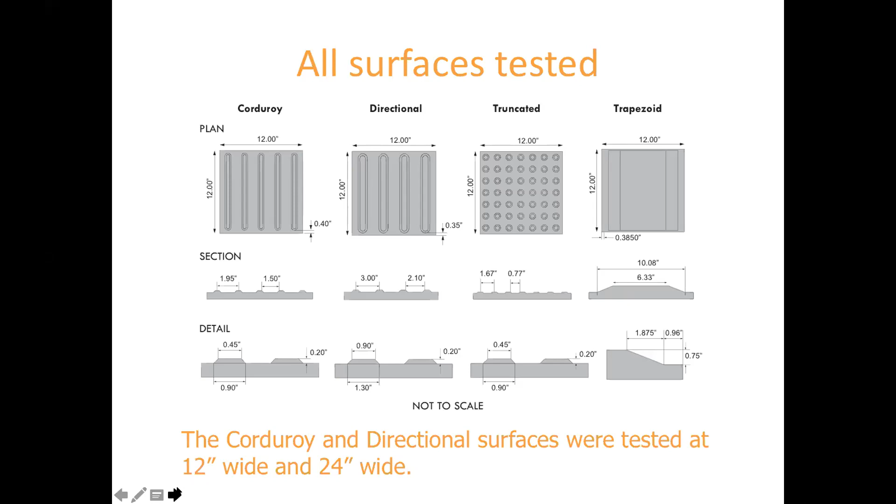And these were all done on 12-inch tiles produced by a company called StrongGo. They were laid out, 40 feet of each surface was laid out, embedded in concrete that was level with the base of each surface, in a pier in San Francisco.

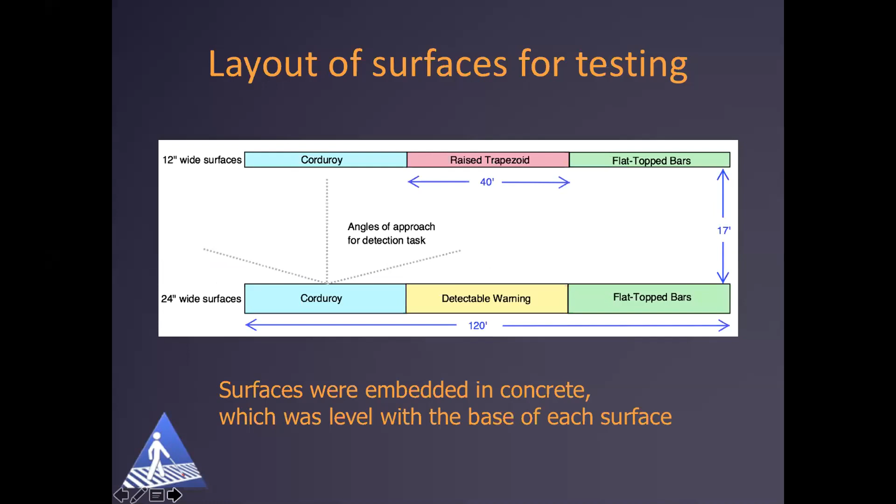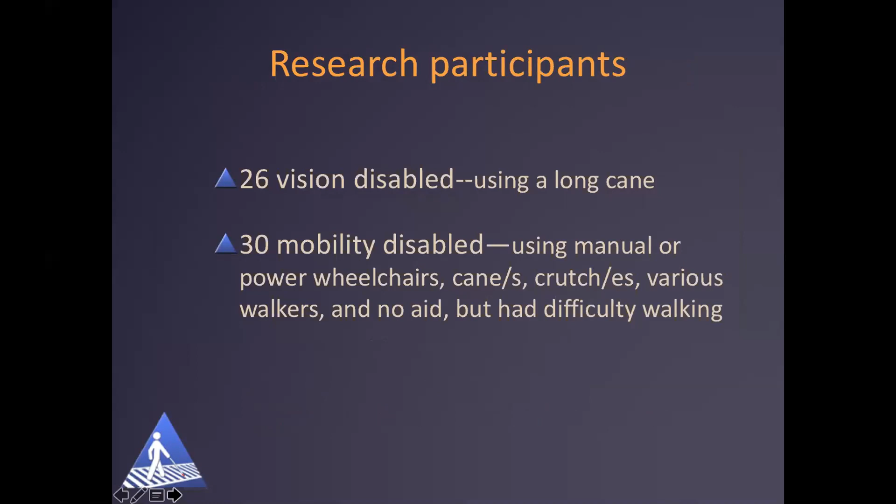The research participants consisted of 2 groups: 26 vision disabled who used a long cane, and 30 with mobility disabilities who used manual or power wheelchairs, canes, crutches, various walkers, or no aids but had difficulty walking.

So what did they do? The vision disabled participants had 3 tasks: one was to detect the surfaces, one was to identify them, and one was to follow them.

For detection, they approached each surface 6 times: twice from 90 degrees, and 2 approaches each from approximately 25-degree angles to the left and right. The 90-degree approach would be, like, if you can imagine, coming out of a building and approaching the delineator and wanting to know how much width of sidewalk you have here so that you're not going beyond it.

The narrow angle approaches, which is the first time this research had been done in this way, are thinking about the pedestrian who is walking down the street, assuming that they're walking parallel and more or less in the center of the pedestrian way, but is gradually veering and getting closer and closer to the delineator and needs suddenly to recognize it when they're not anticipating that it's going to be there at all.

The task that we had them do for identifying it was they were guided onto each surface 8 times at various angles, stepped off after 3 seconds, and identified the surface as domes, bars of any kind, or the trapezoid.

And for following, they followed each surface for 40 feet with the surface on either the left or the right.

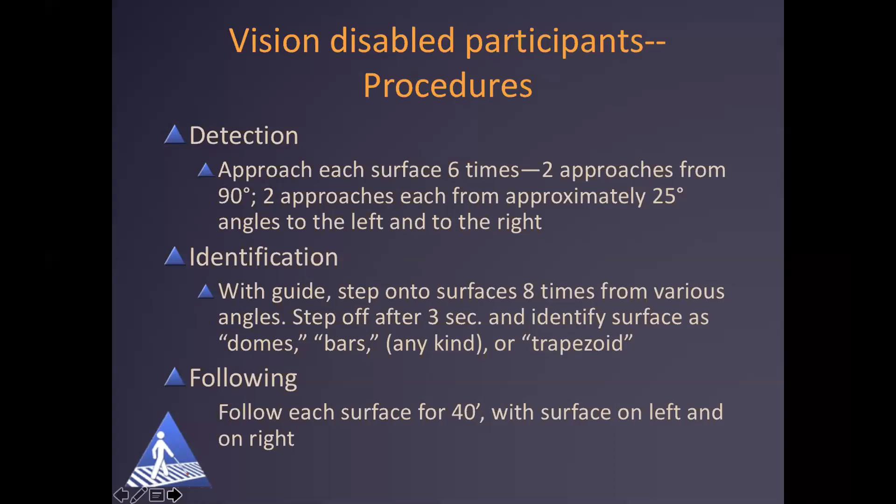I have in this presentation, if you want to look it up later, a number of short videos. I'll just show one here of detection. This is a vision disabled participant approaching a 12-inch wide corduroy surface from 90 degrees, and he detects the surface with a cane, stops without stepping on it, but the cane goes more than 6 inches into the bikeway.

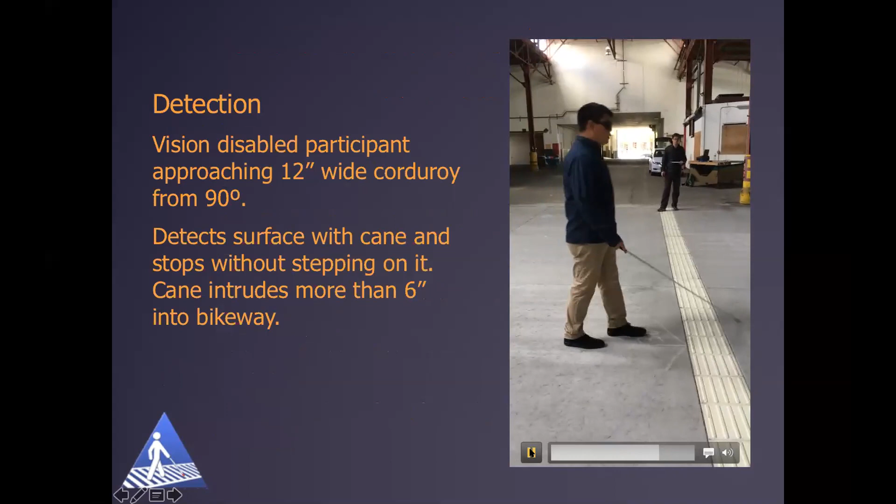As I say, there are a number of short videos that you can see of the detection task. So what did we learn? Basically, we learned that they were all highly detectable. It didn't matter whether you're approaching them from 90 degrees or a narrow angle. I should point out that this measure of detection, sometimes they would detect it and stop going beyond it, or the cane would go beyond it, but it was detected by either the cane or the foot. They were all highly detectable, regardless of the direction of approach.

So anyone could be chosen based on that. When it came to identification, and there's also a slide that shows how that was done, if you look it up on the posted version.

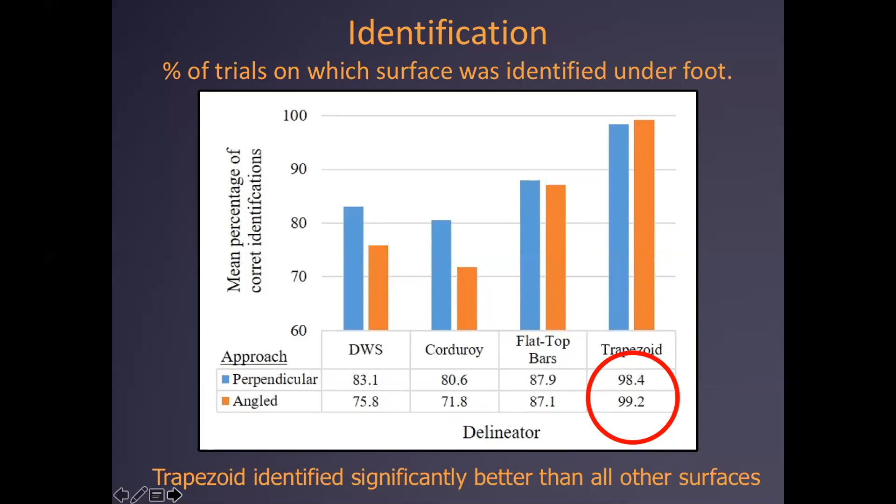There was a marked, significant difference in identification of surfaces. The trapezoid was identified on almost 100% of trials, regardless of whether it was approached perpendicularly or at some angle. Different than all the others. The corduroy and the flat top bars were both often confused with the detectable warning surface. The trapezoid was just unmistakably identified as trapezoid.

There's also an example of following the surface. If you look at the posted version, participants successfully followed the surfaces without losing them on 302 of 312 total trials. So any of them, you can follow them - no significant difference in following them. There were, however, significantly higher rates of cane intrusion for the 12-inch surfaces than for the 24-inch surfaces.

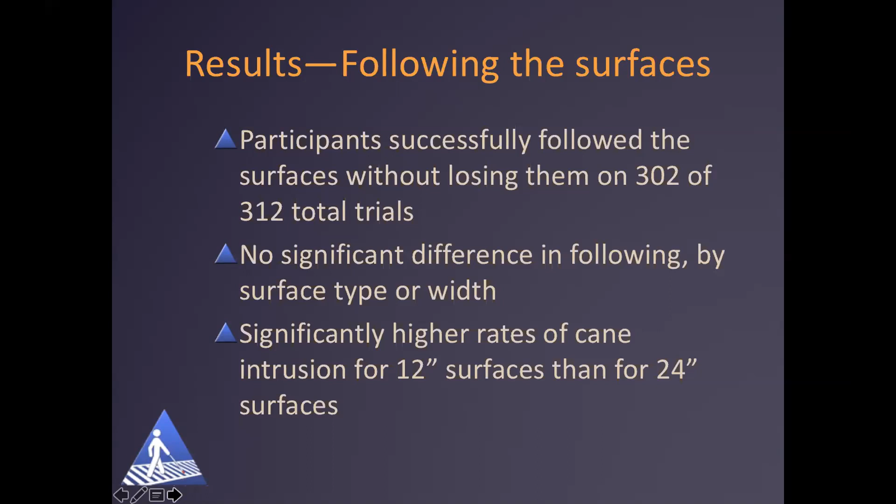So what about the mobility disabled participants? There were 3 tasks for them. They had to cross each surface 4 times.

But they were told that if you don't have to cross any surface that you think wouldn't be safe for you to cross, or if you make one crossing and it's particularly difficult or uncomfortable for you, you can say you'd rather not cross it again. So it really emphasized that they shouldn't cross a surface that seemed like it wasn't going to be good for them. And then as they did that, they were rating each surface for effort, stability, and comfort.

In relation to crossing the detectable warning, which they also crossed, just to remember what that felt like. And then finally, at the end of the procedure, stating a preference for the use of the wide bars, the corduroy, or the trapezoid as a delineator.

So just one short video here of a person in a manual chair crossing the trapezoid.

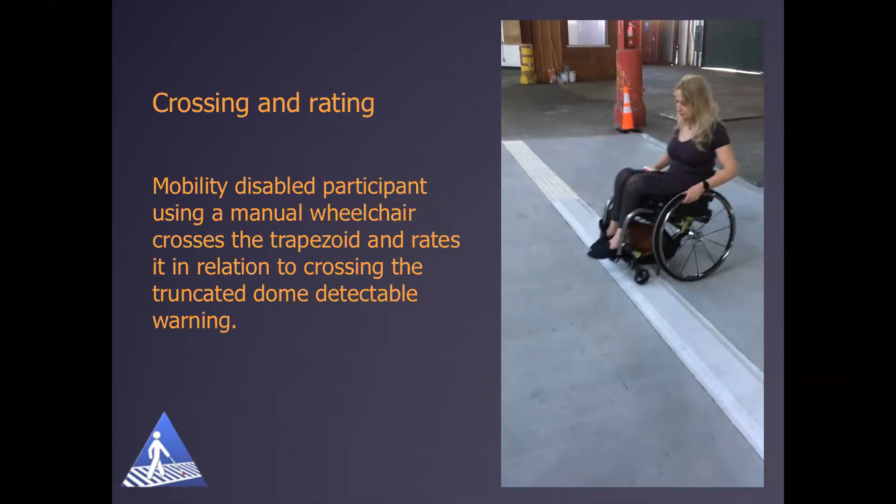Up and over quite easily here. The results were that all the surfaces were readily crossed four times. No surface was a barrier to crossing, regardless of what the aid was. Nobody hesitated to cross them additional times.

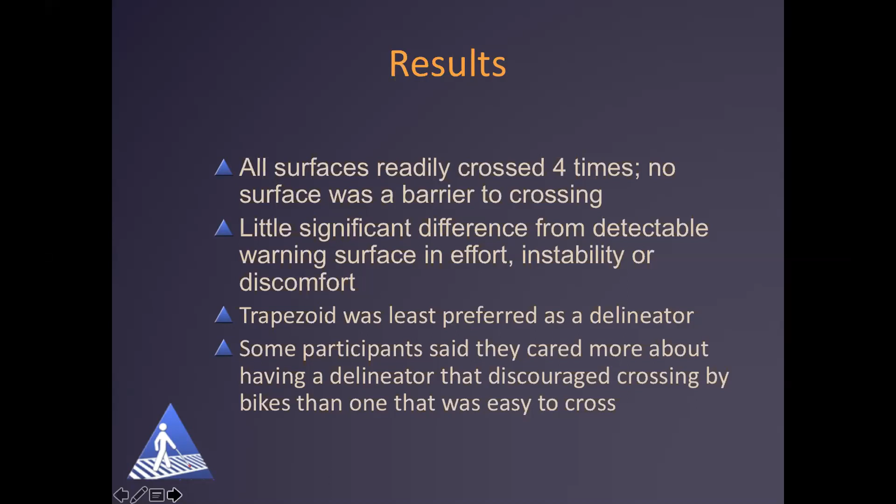In the ratings, there was little significant difference from the detectable warning surface in effort, instability, or discomfort. The trapezoid was the least preferred as a delineator, but some participants said they cared more about having a delineator that discouraged crossing by bikes than one that was easy for them to cross. So the final recommendation was to use a trapezoidal indicator between the bicycle and pedestrian sides of a separated bikeway, at sidewalk level.

The drawing shows the trapezoid as created on a 12-inch tile. The trapezoid itself, the top of it is only 6.25 inches wide, and it is 0.75 inches high.

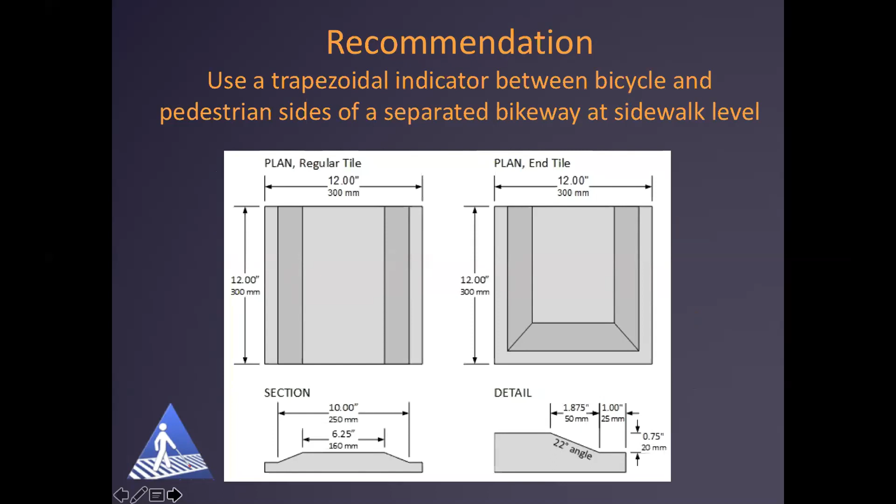Finally, there's a rendering of how this would look on the street, Market Street in San Francisco, in which the rendering shows, from right to left, a transit lane, about a 4-foot wide raised strip, then an 8 or 10 foot wide bicycle lane, then the trapezoidal delineator, then a furnishing zone, then the pedestrian way, and then the building line.

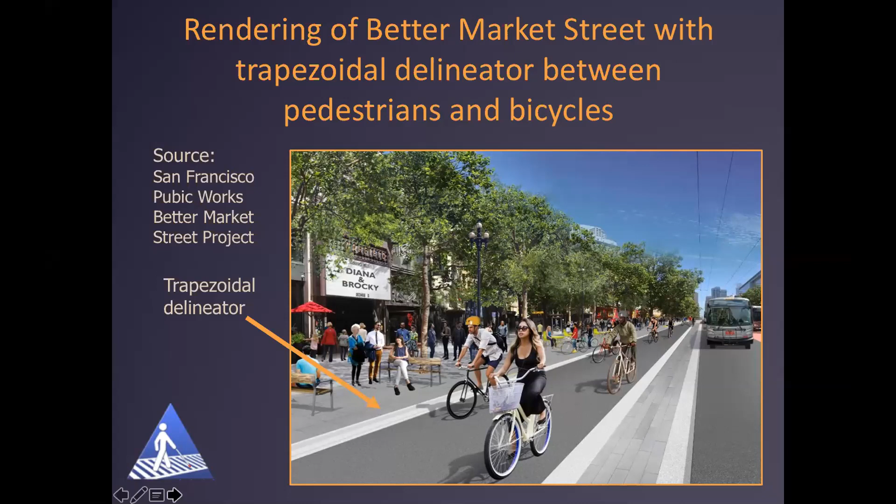I hope that's been helpful to you. I know that we are running out of time and that we do want to have time for some questions, so I will end here.